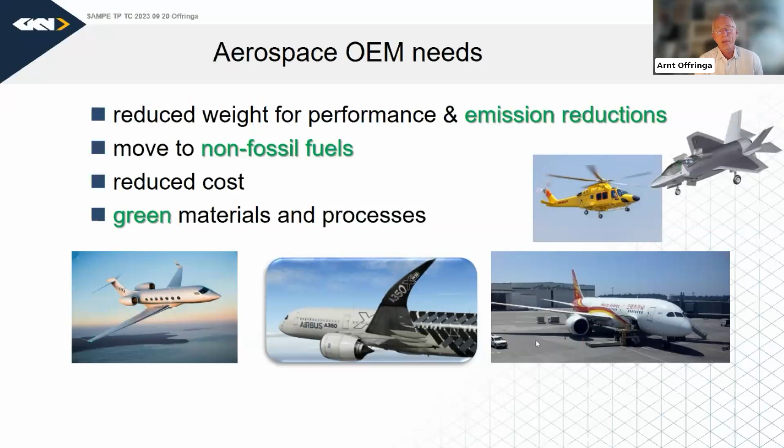So to start with the market, the aerospace OEMs, the large prime manufacturers, need reduced weight now more than ever, not just for performance and cost, but also for emission reductions. We see the move to non-fossil fuels as a clear sign. Think of electric flight, but also hydrogen. There is still the need to reduce costs, as always, and the materials and processes we use clearly have to be green, have to be sustainable, and we'll get back to that in a moment.

There are initiatives in the world on hydrogen. In the Netherlands, there is a project to work on a double-walled composite tank, looking at thermosets, thermoplastics, looking at permeability, assembly technologies. This is led by Toray, and it's a fantastic new environment to be active in. Liquid hydrogen will be used for aircraft, so this is extremely low temperature and a huge challenge with respect to permeability and properties. But this is just starting.

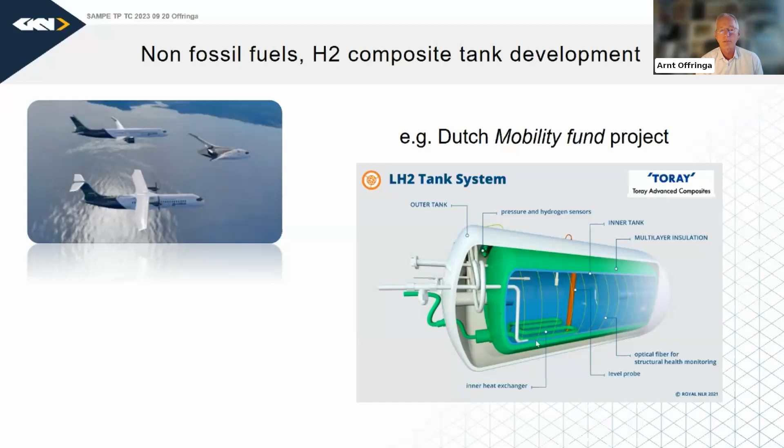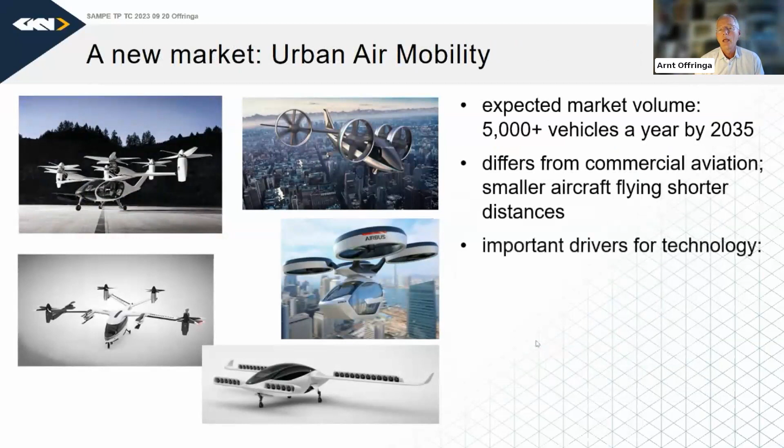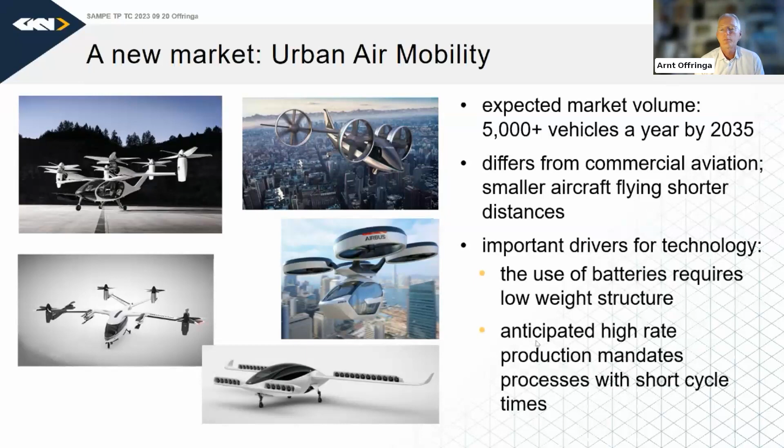Another market segment which is fairly new is the urban air mobility market, with manufacturers claiming that production volumes will be quite large, at 5,000 plus, maybe 10,000 vehicles a year by 2035 or maybe even earlier. However, it's different from commercial aviation. The aircraft are smaller and fly shorter distances. The drivers for technology are the fact that they are battery powered, so weight is of the essence, and the high rate production mandates production processes with very short cycle times. So all of these requirements add up, basically giving the need for innovative designs with lightweight and tough materials, very fast processing, and preferably low energy use during production.

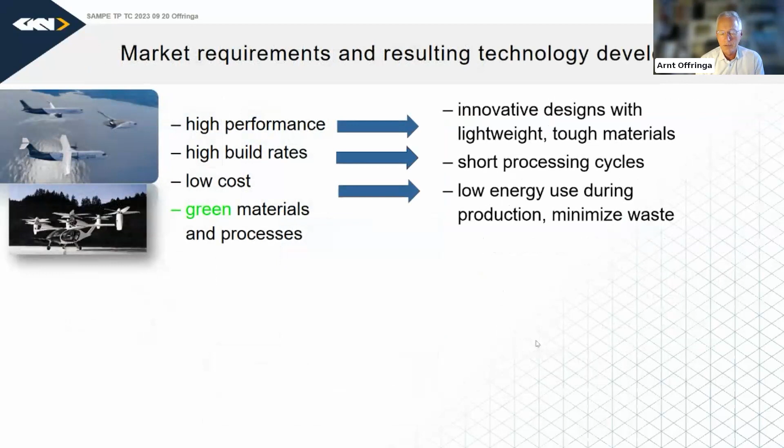And for large parts, if we look at autoclaves, which is the standard today, energy consumption is fairly large. So thermoplastics fit into this picture, with the polymers being very tough, there being the opportunity to create very innovative design concepts and to have cycle times which can be extremely short. Like for ultrasonic welding, for example, it's less than a second, to name an example. And then recyclability - with thermoplastics, we have full recyclability of the polymer and the fibers.

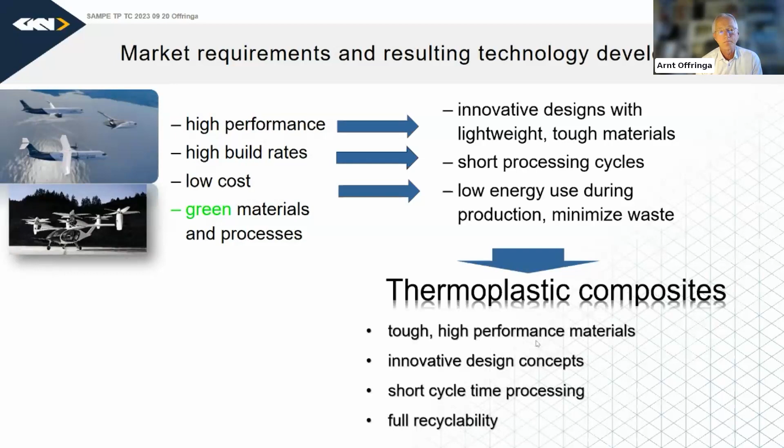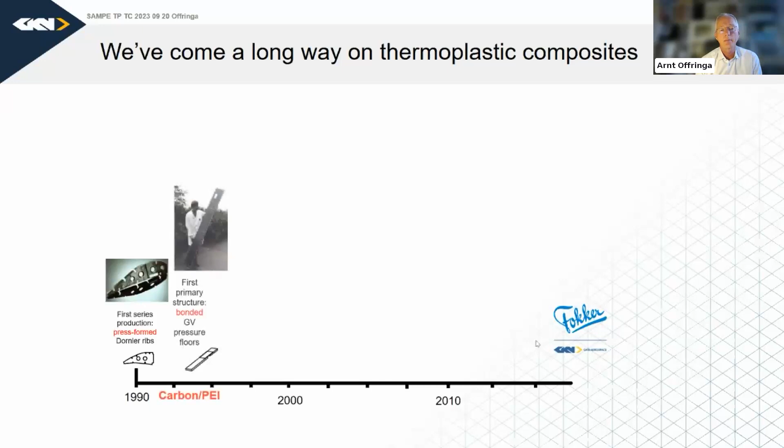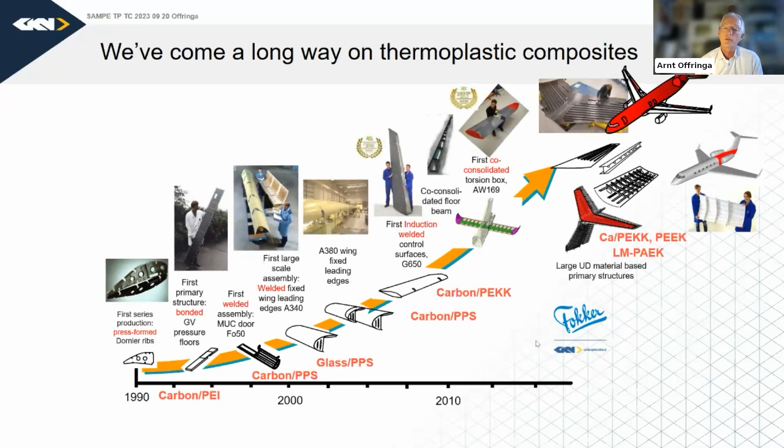So our legacy within the company goes back to the Fokker days in the Netherlands, starting in the 1990s with stamp-formed parts like ribs, then moving on to floor panels and other parts, ever larger parts. Today, our ambition is to really look at a large scale at the opportunities for thermoplastics, for example the fuselage of aircraft, full tails of aircraft, and also at high rate.

Now, this is very challenging, but how did this all start? This started many, many years ago in the early 90s, and there was a supplier with a vision. At the time it was TenCate Composites, now part of the Toray Group, Toray Advanced Composites.

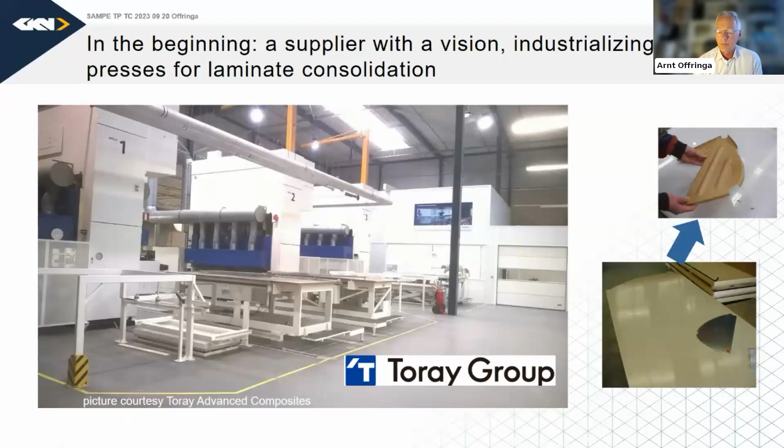This picture here is of the manufacturing facility for laminates of 4 by 12 feet, 1.2 by 3.6 meters. We see several presses working in parallel to create laminates, and with these laminates you can, for example, create stamp-formed parts like ribs. In the early days, that's what we did in the 1990s.

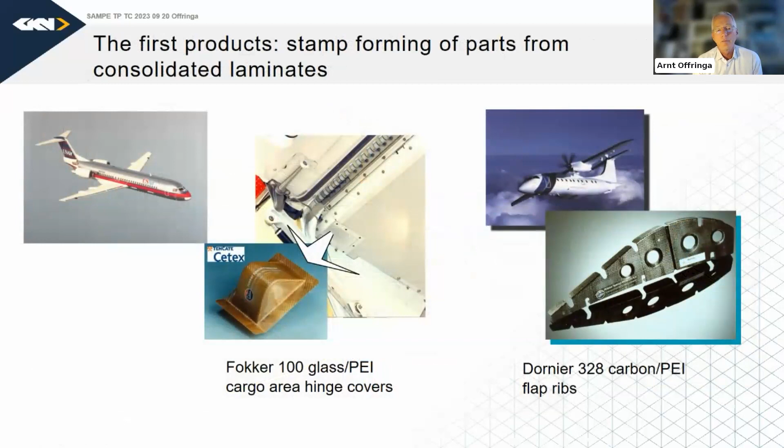So I started with deep drawing and stamp forming for all sorts of aircraft, also developing panels for wings with a creep forming process—so not an autoclave process, but creep forming. On the right is a plate which is formed by folding and by ultrasonic welding. So these are all out-of-autoclave processes.

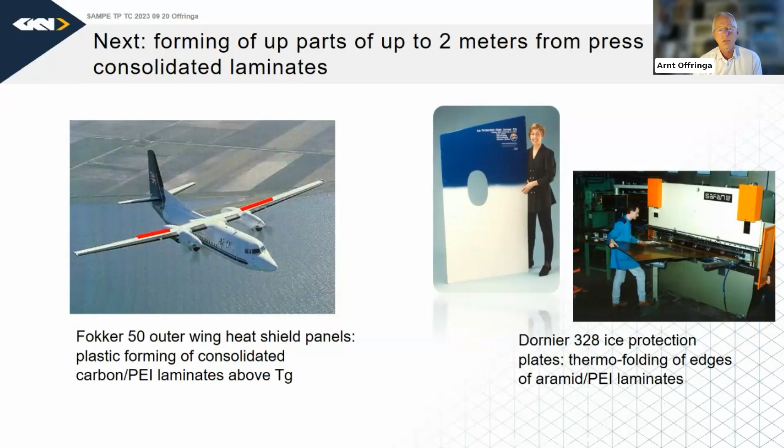So here we are working out of autoclave up to, let's say, about 2 to 3 meters in dimension, also here with floor panels for aircraft. These floor panels are sandwich structures with a core material in the middle, and to create the sandwich structures with high quality, the autoclave was used as a standard.

You could possibly use a press as well for certain parts, but this was the first use of an autoclave for thermoplastics in the early 1990s.

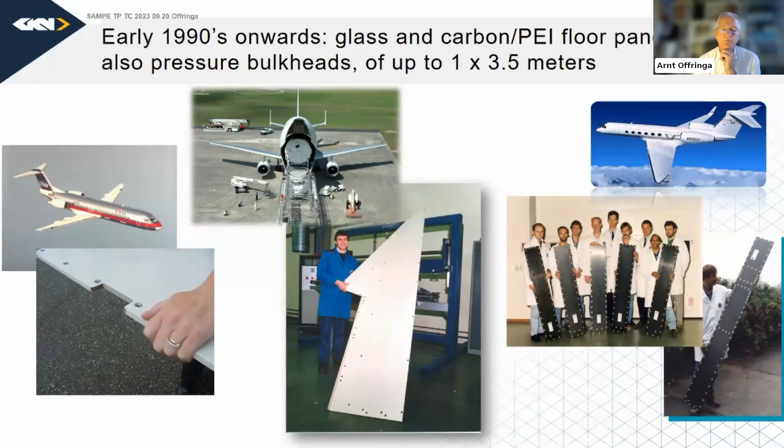Then along came a very important opportunity with Airbus in the United Kingdom on the A340 long-range aircraft. The wing leading edge, the fixed leading edge, was an aluminum design, and the design team wanted to investigate whether weight could be reduced by going to composites, preferably thermoplastics, because of the possibility to weld structures together. And that's what happened in the end.

So collaboration between Toray, ourselves, and Airbus resulted in this product, which is a welded structure with stamp-formed ribs, stamp-formed stringers, so stiffening elements. However, the skins themselves had to be autoclaved. We were hoping to make them out of autoclave with purely vacuum in an oven, but because of all the thickness variation in the product and the complexity of the layup, that proved to be a big challenge. So we did go to an autoclave.

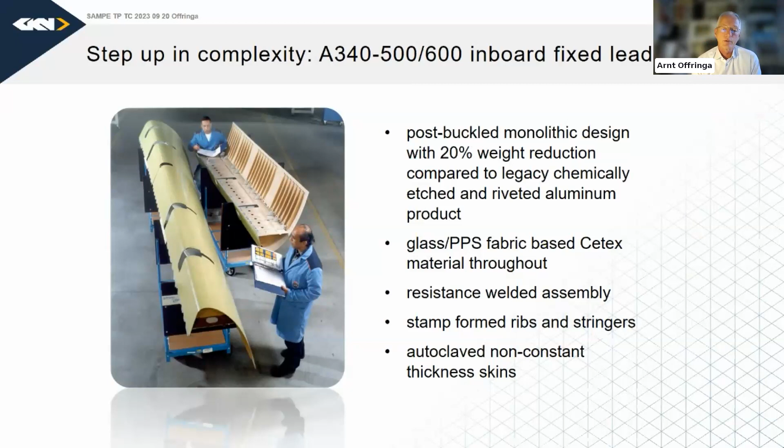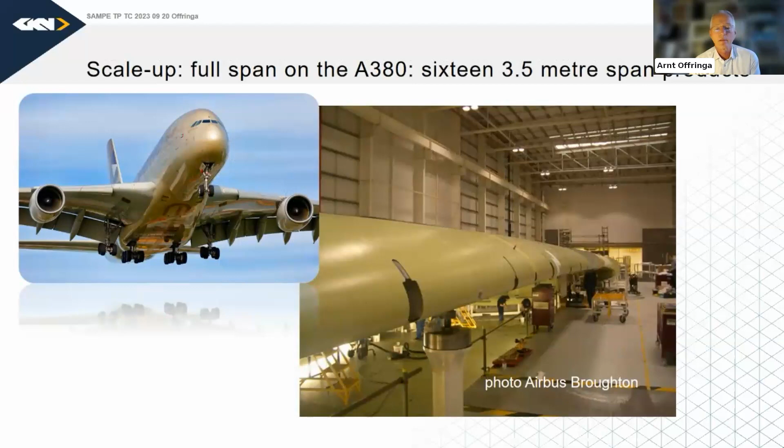And here we see the A380, which also has this same product at a much larger scale. These products have a length of approximately 3.5 meters and a height of about 1 meter. The welding is highly automated—that's resistance welding—but the skins are autoclave, so fairly traditional.

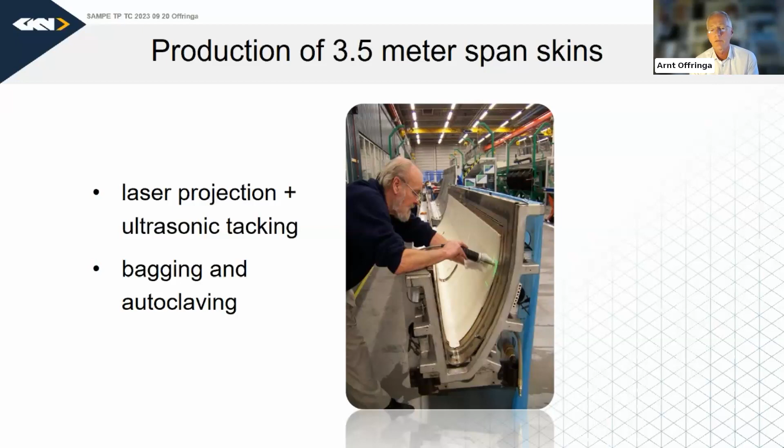We see here the layup process, laser-assisted projection, then it's vacuum bagged and then autoclaved in a fairly efficient autoclave cycle. It's faster than with thermosets, but still it is time intensive, very energy intensive, and you have bagging materials which you cannot reuse afterwards.

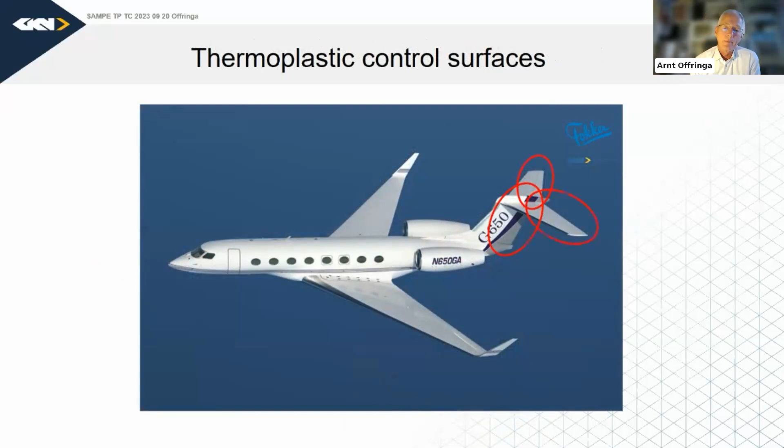This was in the late 90s. In the early 2000s, opportunities opened for control surfaces of business jets, such as this Gulfstream aircraft. So the technology was developed in the Netherlands in a consortium, and then basically shown to several customers. And with Gulfstream, we got an agreement to implement this new technology, thermoplastics, on rudders and elevators of their aircraft.

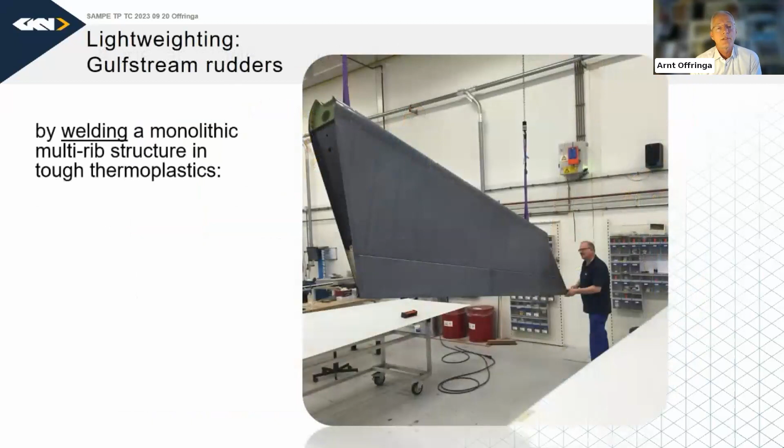And here is the part. So the business case is to weld instead of to bolt, so to reduce cost and to reduce weight—a 20% cost reduction mainly because of the fact that we are welding instead of riveting.

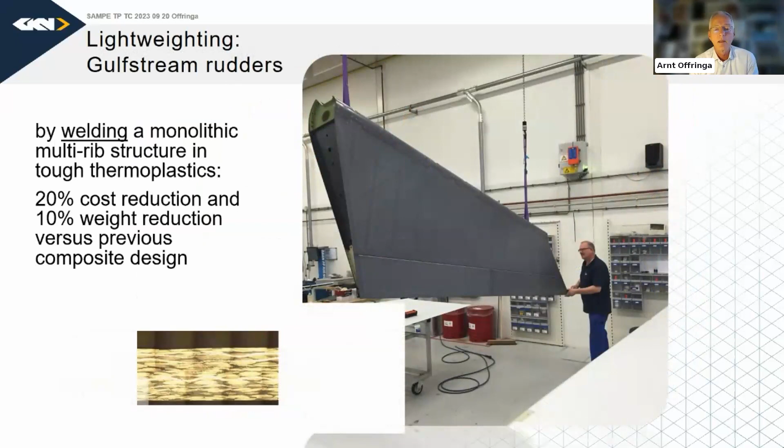And if we look at a weld under the microscope, it looks like this. If you cover two sides, it's very difficult to see where the division is between the skin and the rib flange in this case.

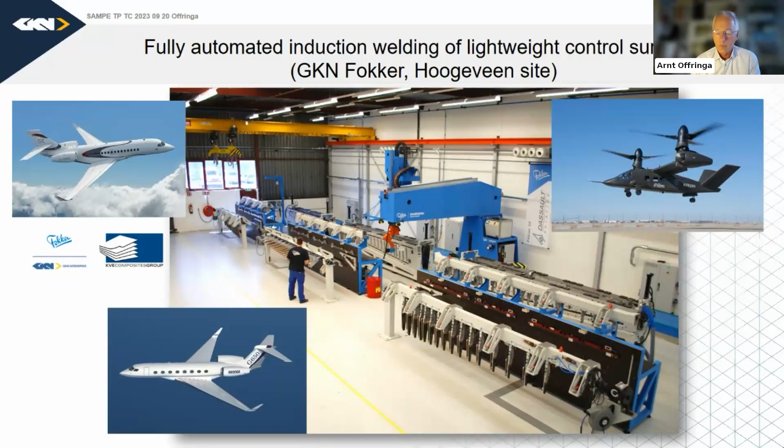So today we are very proud to manufacture these products for several customers in a highly automated environment. The welding itself is on license from KVE Composites Group, which we industrialized in our company ourselves.

Now, the parts to make these rudders and elevators are several. First of all, ribs, which are up to maybe 1 meter in length—these are made in a press, so out of autoclave. But the skins are about 6 meters in length and can be up to 1 meter wide, so we don't have a good technology today to make these efficiently out of autoclave.

There's a lot of thickness variation in the skin, so we do these in an autoclave. Making the skins is fairly simple. Making the spars, shown in the bottom right picture, is more complex because it requires much more attention to the bagging procedure.

The spars have a small radius where the material goes at 90 degrees around the corner. There you have to put a lot of attention into the bagging technique, and it would be very nice if we could have an alternative for this.

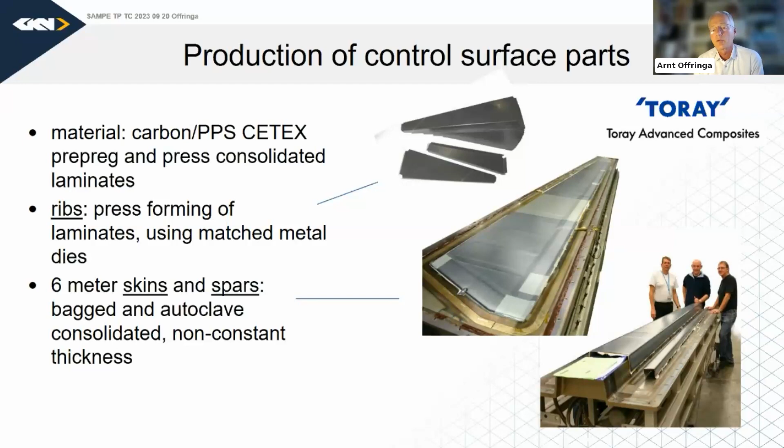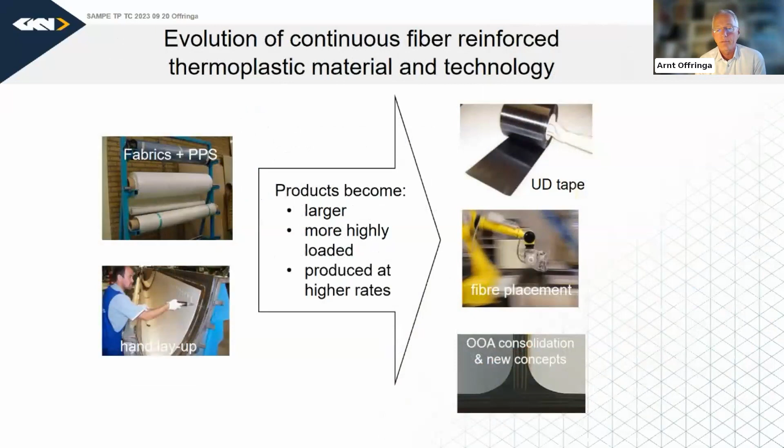Today we see a move in technology from what we know from several years ago, hand layup working with fabrics, to more automated processing with unidirectional tape, where the fibers run only in one direction, and also developing new innovative concepts. For example, the picture at the bottom right shows a perpendicular joint in thermoplastic composites, where the polymer itself is basically connecting the two elements instead of the fibers going around the corner in a radius.

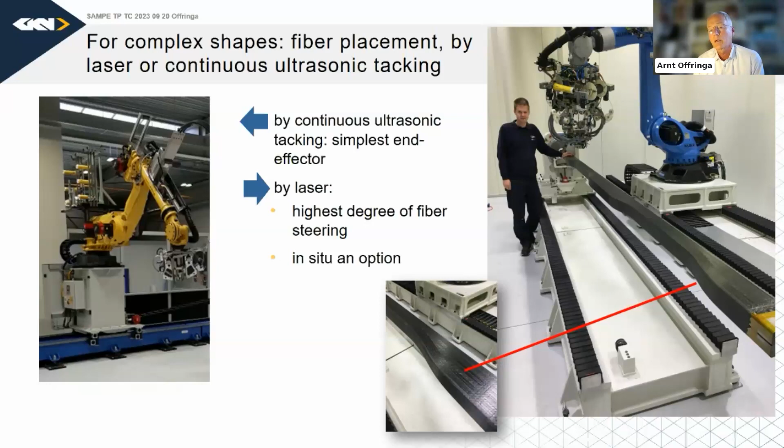To make parts with this unidirectional tape, we're looking towards more automated layup processes such as tape laying and fiber placement, for example with laser or ultrasonic tacking, to have fiber steering and to make highly complex geometries. The picture on the right is a floor beam of 4 meters, used in the multifunctional fuselage demonstrator, a Clean Sky 2 European project with Airbus in the lead.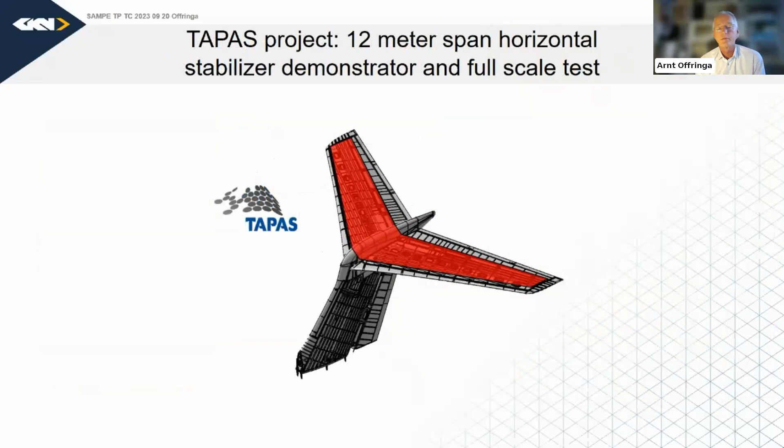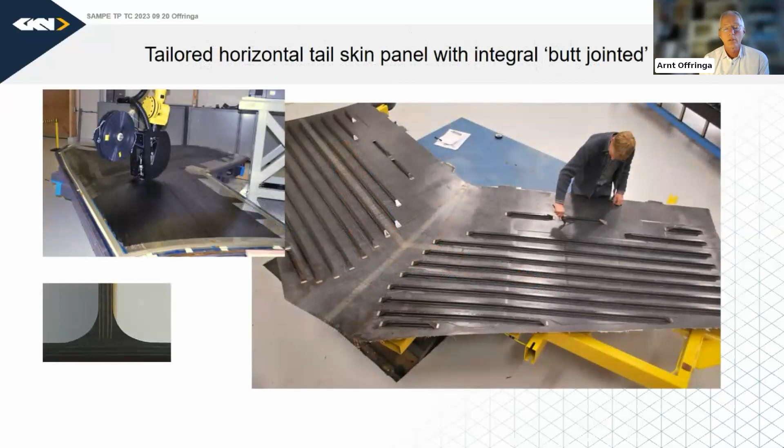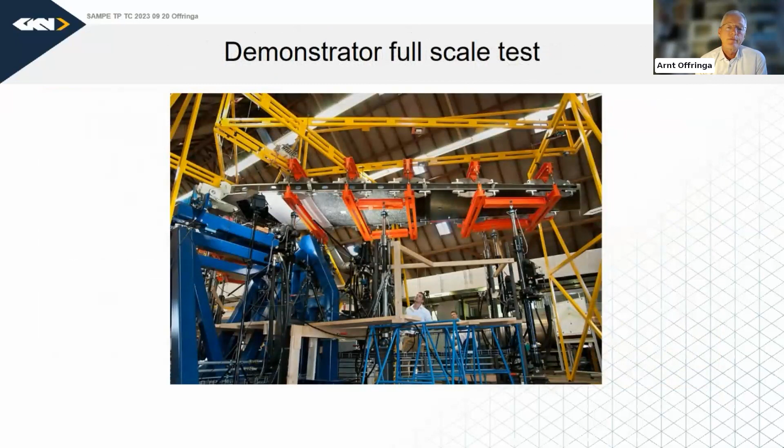We also had a project called TAPAS in the Netherlands with a consortium to develop, among others, a 12-meter span skin for the tail of a business jet, also using fiber placement and new technology to create perpendicular joints. We tested this technology at full scale with the Dutch Aerospace Laboratory, the NLR, and achieved very good results and a TRL 6 assessment.

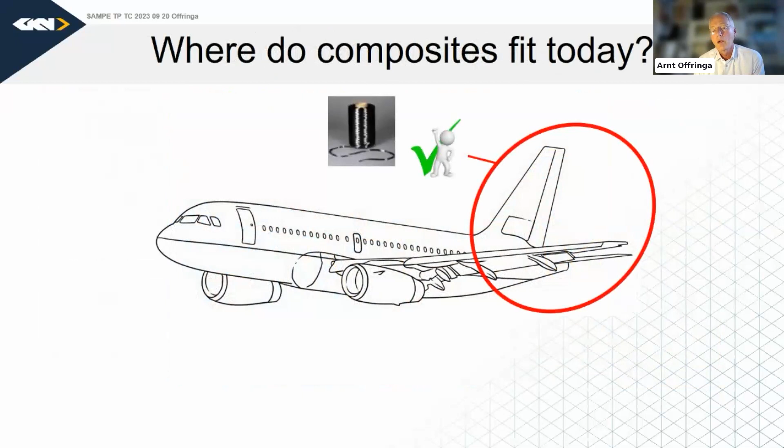So, summarizing, where are we with composites today on aircraft such as narrow-body airliners? I think it's fair to say that for the vertical and horizontal tails of aircraft, carbon fiber reinforced composites are here to stay. That's the standard, established, accepted solution.

For the wing, it seems to be the same situation, where composites offer very good fatigue resistance and weight reduction, so less maintenance costs - also a very good solution.

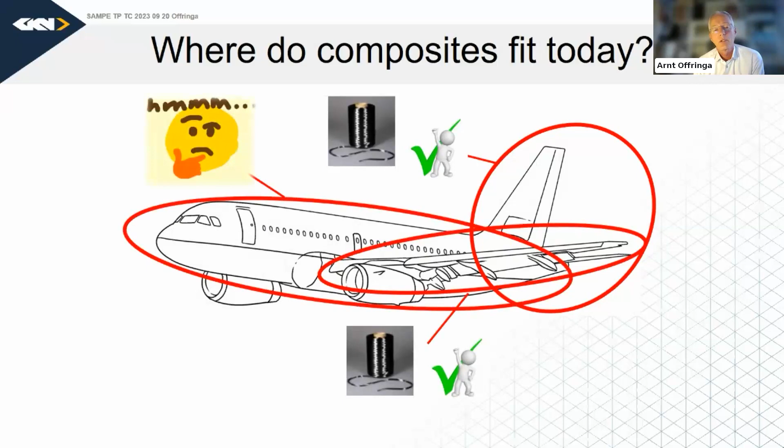For the fuselage, it's more of a debate. There are aircraft, the 787 and A350, with full composite fuselages, but it has proven quite a challenge to make them weight and cost effective. The reason is that a fuselage of an aircraft is a very thin pressurized shell, which is very damage prone, either by lightning strike, hail impact, bird impact, or even accidental impacts on the ground. So we need tough, lightweight materials and robust designs.

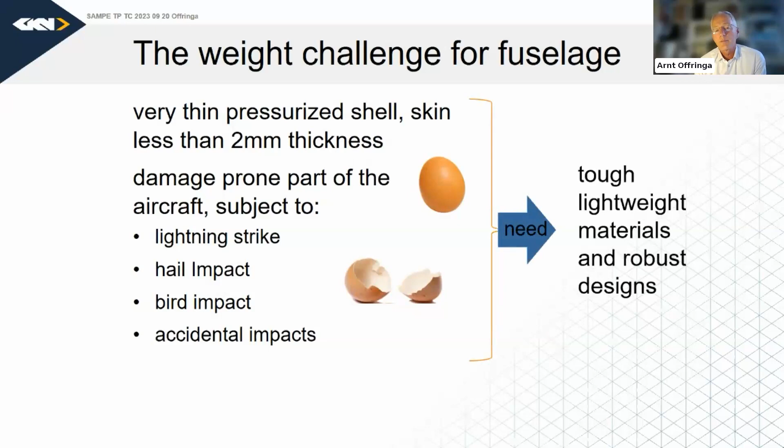Note the amount of bolts needed to attach the frames to the skin itself - that's definitely a cost driving element. The skins are autoclaved today, and that's also something which would be elegant to move away from.

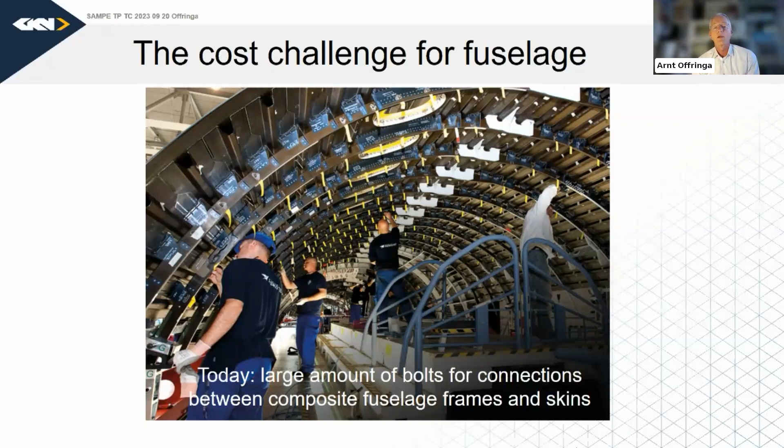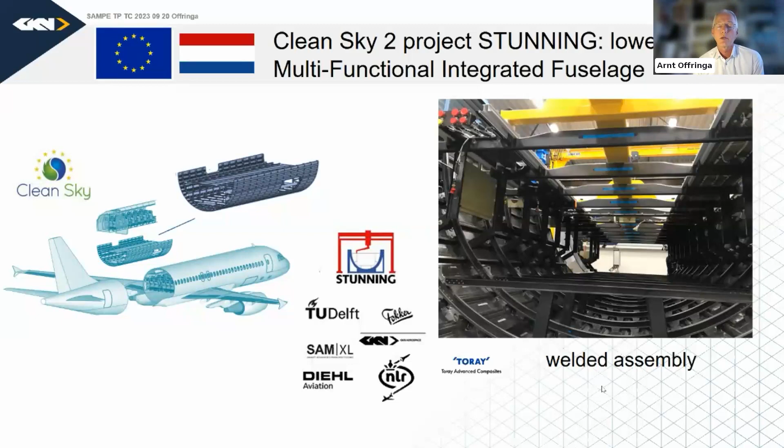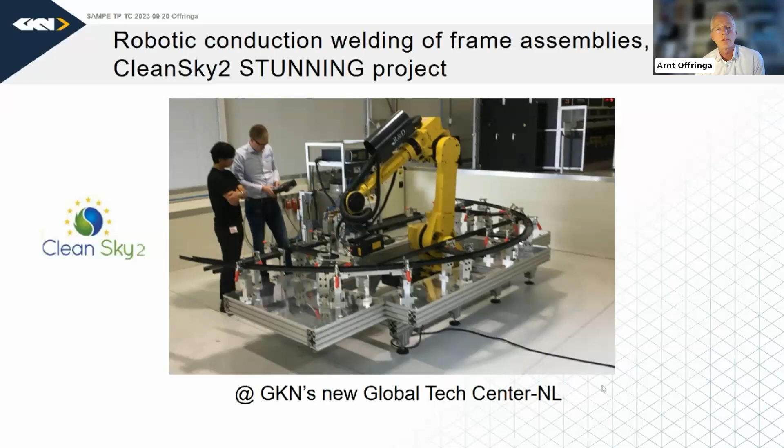So welded as much as possible, and it is welded indeed. For example, the frame sub-assemblies are welded robotically, and we see this in our tech center with conduction welding technology - much like an automotive setup. Then the stringers on the skin are also welded; the Omega stringers are welded with the same process. The injection molding brackets were ultrasonically welded by SAM XL in Delft to create the full fuselage.

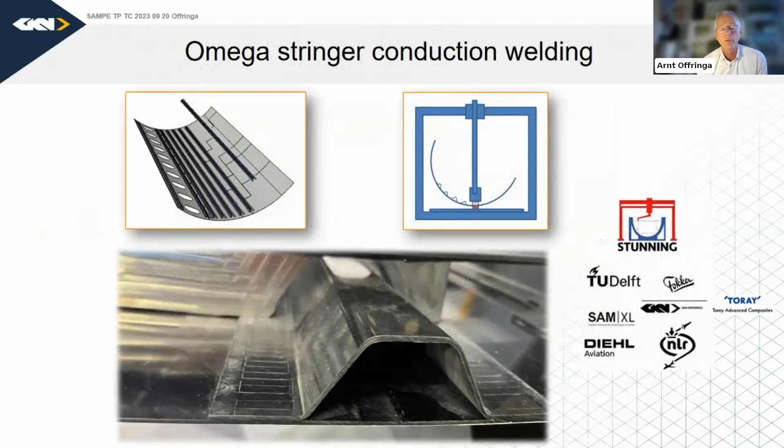An alternative concept for fuselage is to use this new joint technology to create stiffening in two directions, so-called orthogrid stiffening. That's also possible. Today, this is done in an autoclave, so here we would also like to go out of autoclave for these panels.

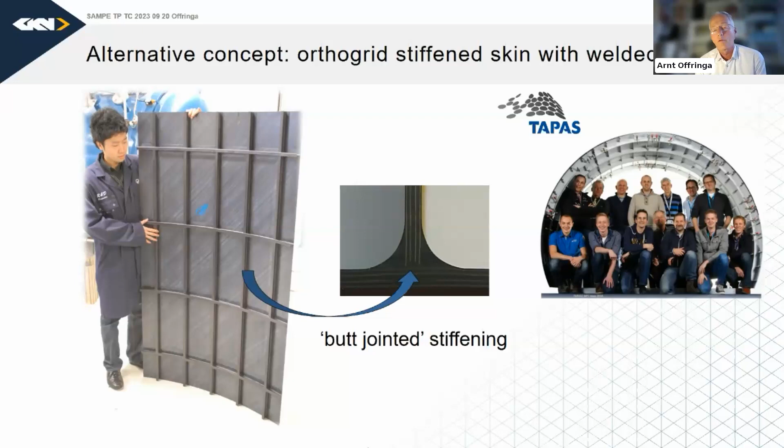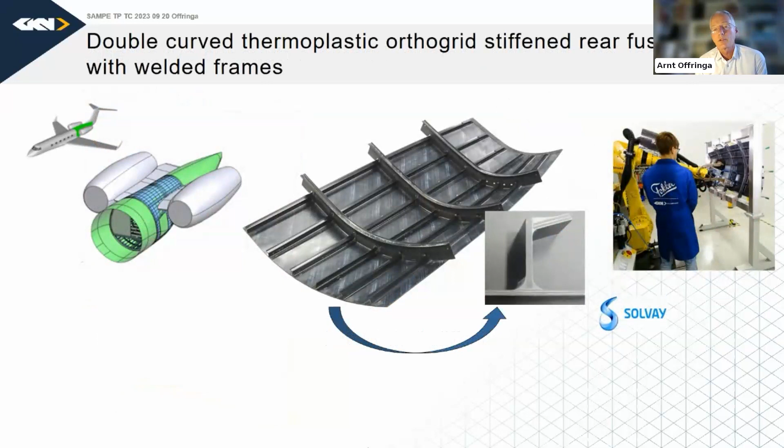Fuselage panels can be fairly large. The diameter of a small size Boeing or Airbus is around 4 meters, and the length could be anywhere between 8 to 12 meters. So these are pretty huge panels to make. The fuselage concept is also being developed together with Gulfstream to see where it would fit on a Gulfstream type aircraft, making panels with much more complex curvature.

So in 2023, we are scaling up to a large length panel with this technology.

So what is the state of the art? For large parts, really large parts with good quality, mostly we have to go into an autoclave. The cycle times are shorter than for thermosets, but we have a huge mass of steel and tooling to heat up each time. This autoclave, which is 3.5 meters diameter, is about 4.5 megawatts, so that's a fairly powerful autoclave. And we have a lot of bagging to do each time, bagging our products with flexible foils that most often we cannot reuse. So the question is, can we find an alternative to this?

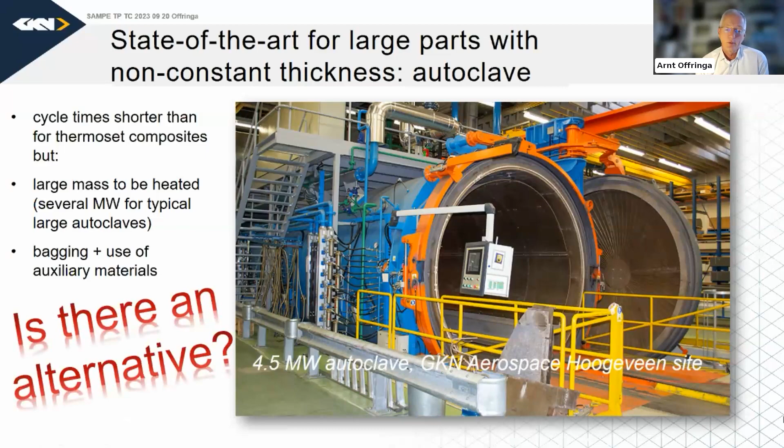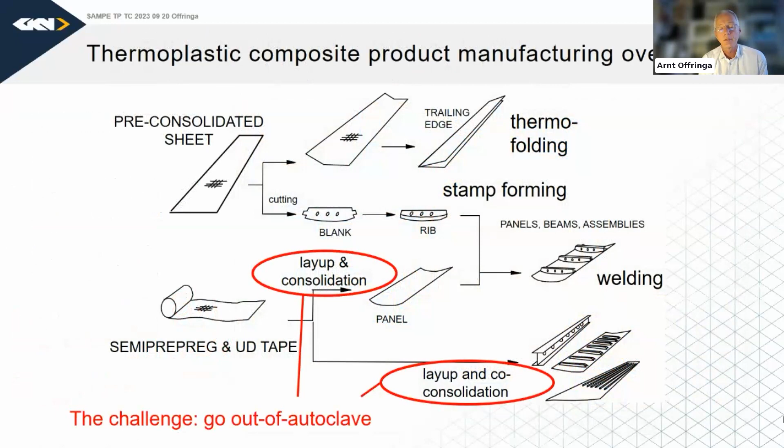We've decided to focus on the layup and consolidation process, and also for more complex parts, the layup and co-consolidation process to make more complex products. So in this overview of production technologies for thermoplastics, the focus is here to go out of autoclave if possible.

In GKN Aerospace's Tech Center in the Netherlands, we've been blessed with funding to invest in new equipment. This is shown in this overview, basically starting with the material and then laminating on a flat plane, or making fiber placed three-dimensional shapes, and then moving on to a consolidation or co-consolidation step to get the final part quality. The product could be anything - could be a spar, could be a rib, could be a panel itself.

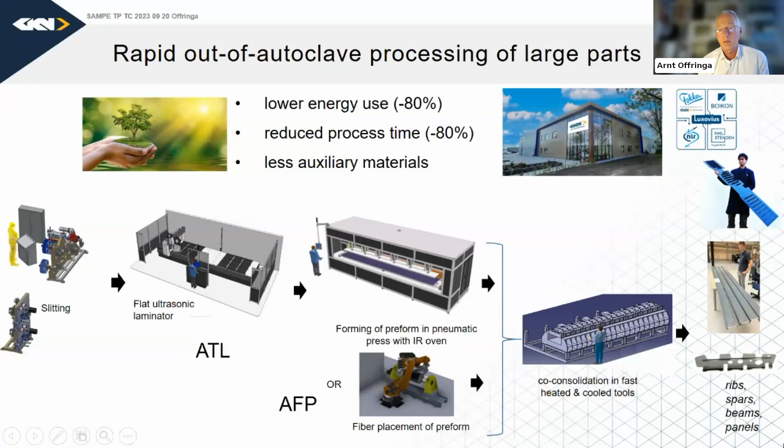So the spars had to be high quality with tapered thickness, large size - this is 3.5 meters - and then out of autoclave. The same question was on a project with Airbus on the Wing of Tomorrow, to create a rib for a wing in thermoplastics with complex geometry without the use of an autoclave. That's also made in the same process.

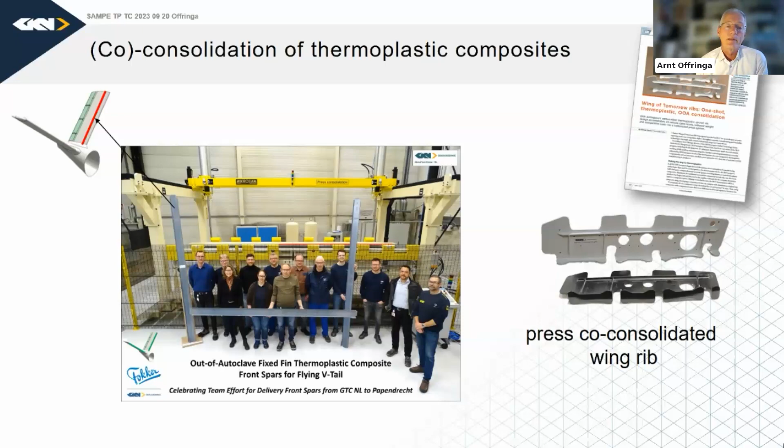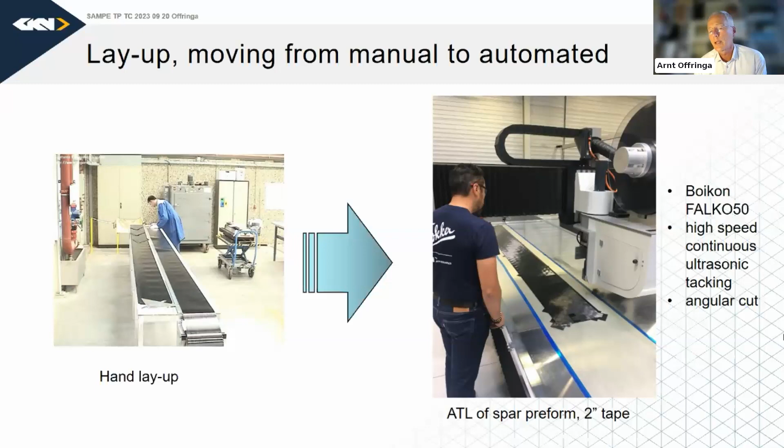The process starts typically with a flat material. On the left is the way we would do it several years ago, but on the right is using equipment, a machine, to lay down thermoplastic tape. It's 2 inches in width, or 50 millimeters, and it can be laid down at very high speed, up to 2 meters per second, and cut at an angle. It uses ultrasonic energy to attach the layers to each other to make a laminate.

The next step is to take this laminate into a press. It's a fairly simple press, pneumatic press with an oven behind it. The material is clamped, as in the picture, then moved into the oven and then back into the press and quickly stamp formed into a shape, such as a spar.

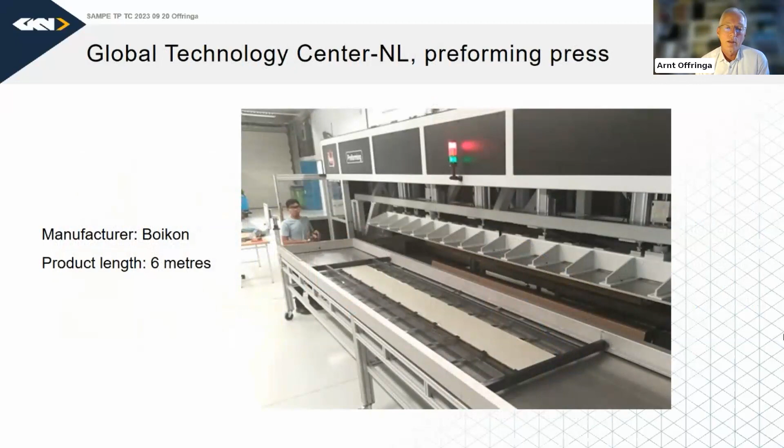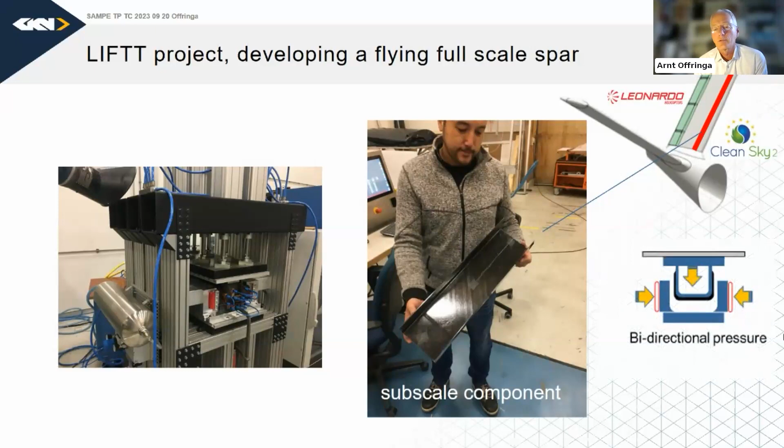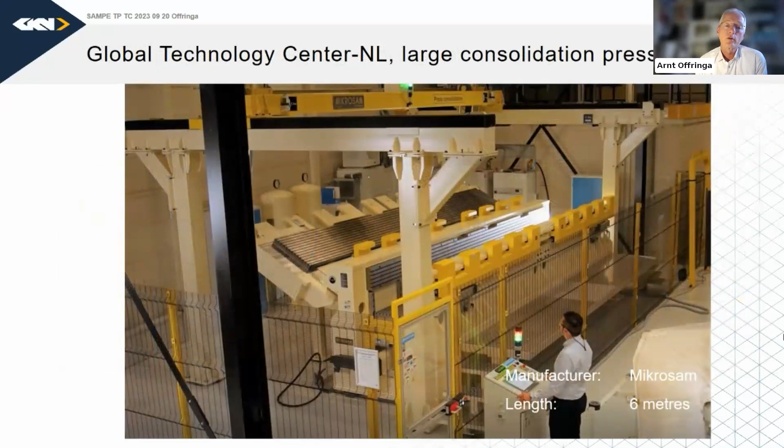This slide shows a large press frame of 6 meters, which fits a tool. The tool fits inside the frame, and the tool has its own pressure system, heating and cooling. So it's suited for large volume production.

So the flight-worthy spars are now ready, have been assembled into the tails of this tilt rotor aircraft, and will be flying, I think, by the end of this year, or was it early next year?

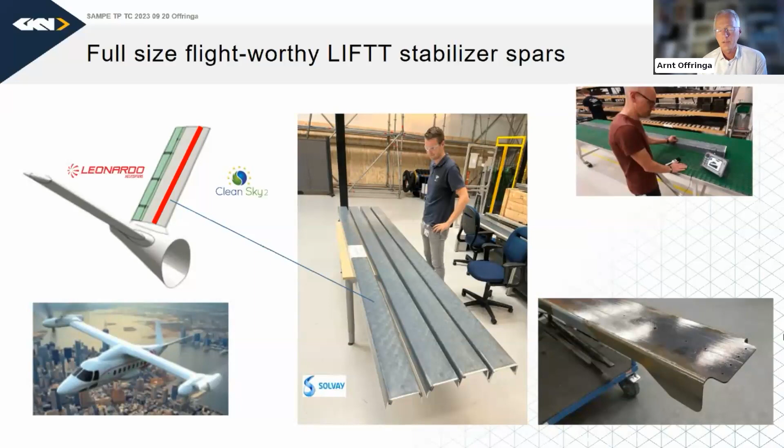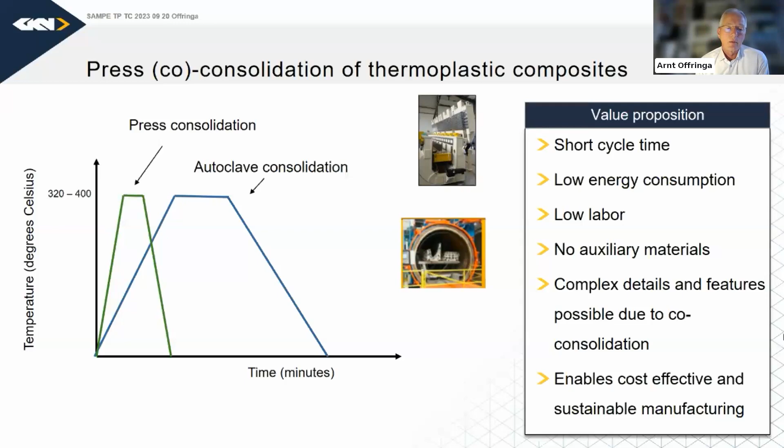So a new development in urban air mobility, recently announced this summer at the Paris Air Show, is with Joby. We have an agreement to develop and produce the control surfaces on their aircraft in thermoplastic composites.

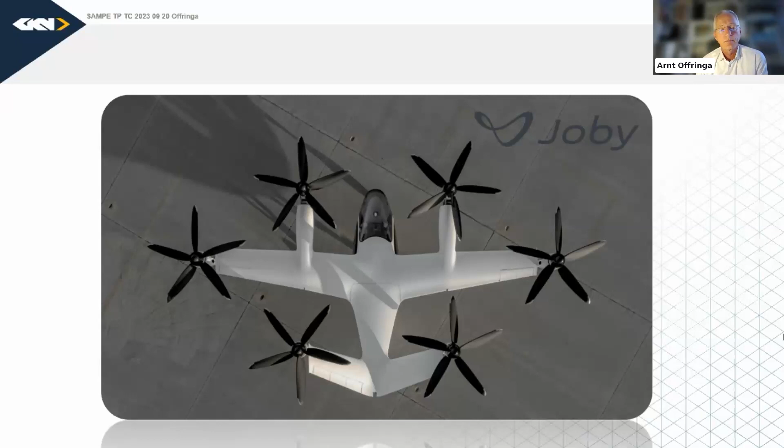The positive element to add is that not only will it be a thermoplastic component with several innovations incorporated in series production, but it will be produced out of autoclave. The basic technology shown in the previous slides will be used to create these control surfaces.

The investments here are significant, that's a fact. However, you make your business case, and for example, for a Boeing or Airbus type aircraft, if you have a large production volume, this does warrant significant investment in equipment if the build rate is elevated as it is today.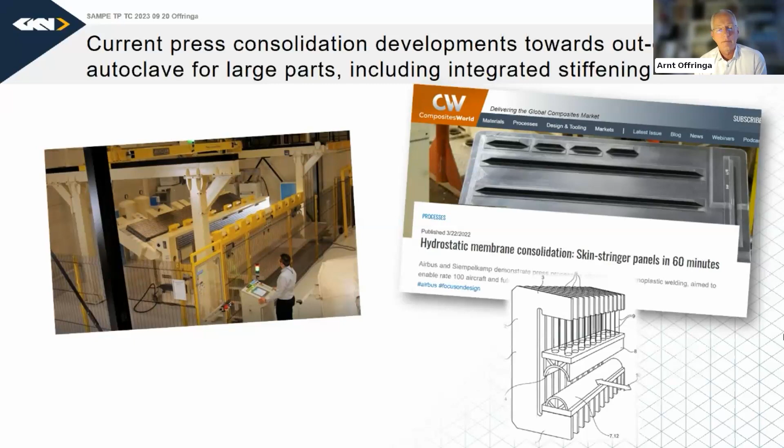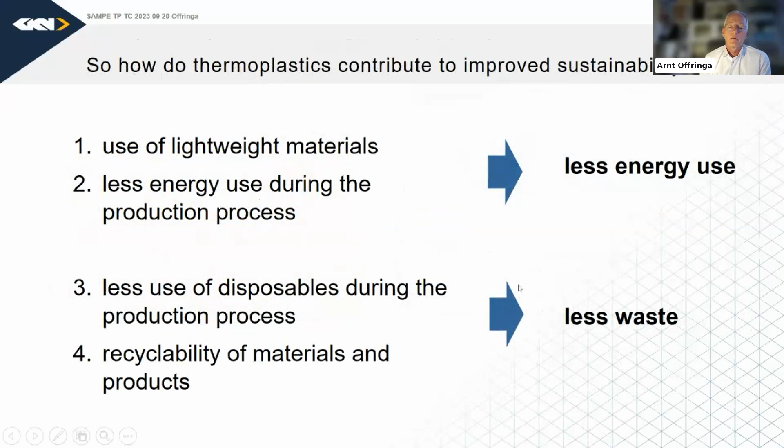So how do thermoplastics contribute to sustainability, also with out-of-autoclaving? Of course, the lightweighting of materials reduces energy use during the production process. We will also have less disposables during production, and we want full recyclability of materials and products, resulting in less waste. Today these are drivers for technology development.

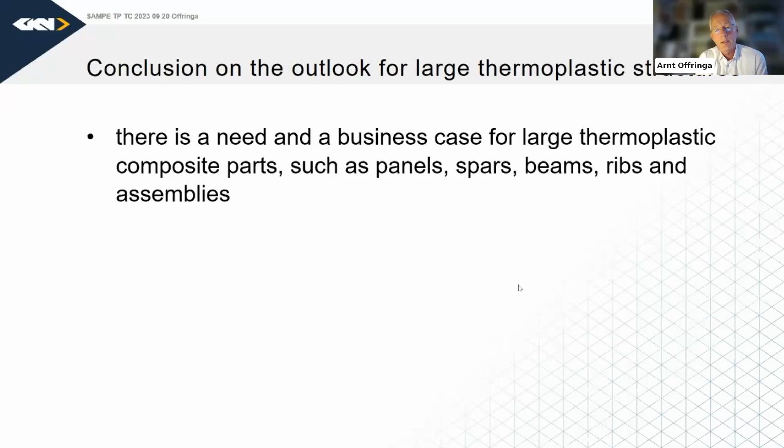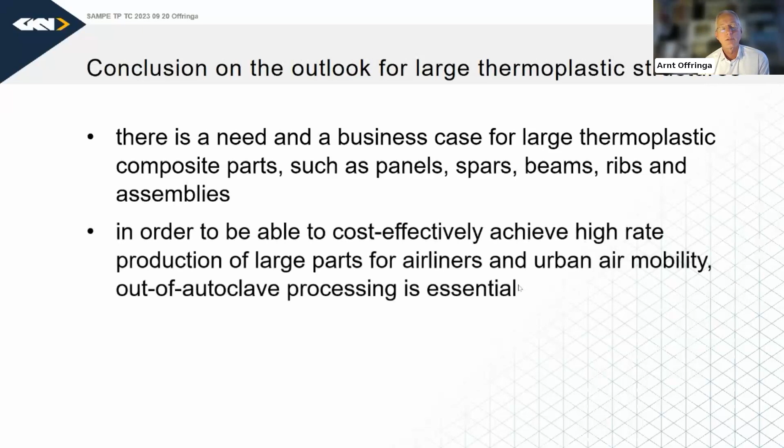To conclude on the outlook for large structures: there is a definite need and a business case for large thermoplastic composite parts such as panel spars, beams, ribs, and assemblies. In order to be cost effective with high rate production for several markets, we need out-of-autoclave processing. The journey has really started, but it will be a focus for several years to come.

So with that, I'd like to thank you very much for your attention, and open the floor if there are any questions to be asked. Thank you.